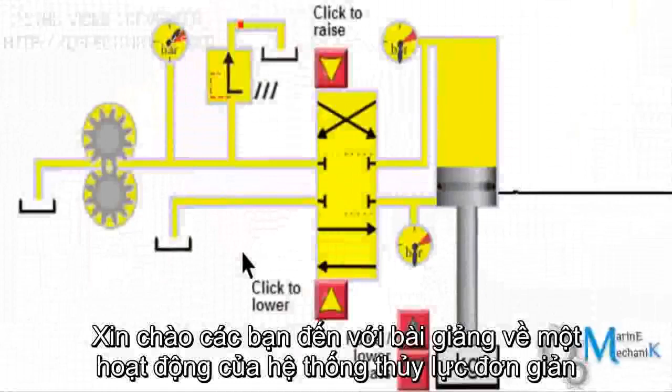Welcome you all back to my new lecture on simple hydraulic circuit working and its simulation. Before proceeding to the working of the circuit, let us understand the components displayed in the circuit.

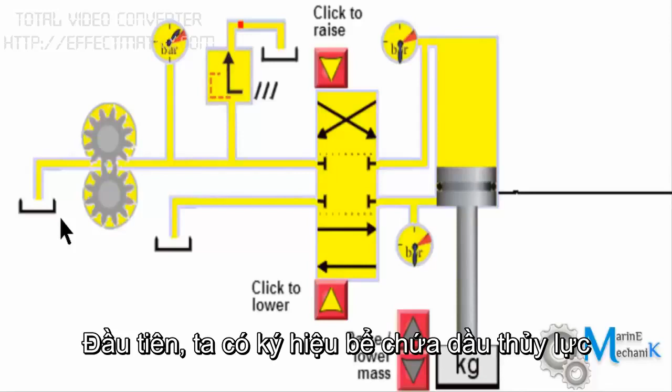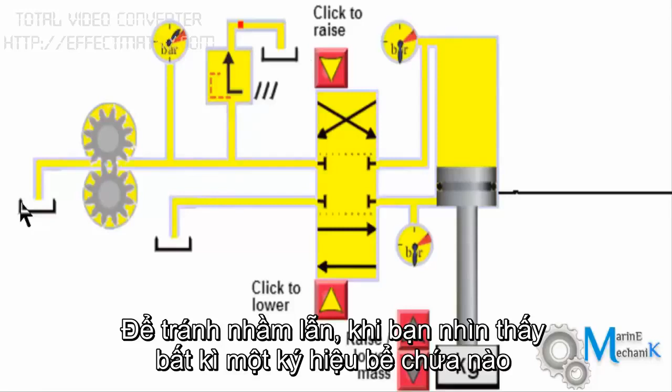First you have the tank. This symbol represents a reservoir which contains the hydraulic oil, or a tank. Again, this is going to be the same tank. Instead of showing the pipelines extended to the same place, for simplicity they have shown it here and also here. This saves or avoids confusion when you understand a hydraulic circuit. Any place of the hydraulic circuit where you find a reservoir like this means everything goes back to the tank.

After the tank, a gear pump takes suction and then presses up the oil directly up to this control valve, that is the direction control valve. You have a pressure gauge here to tap the pressure reading, and a safety relief valve to relieve the excess pressure back to the tank.

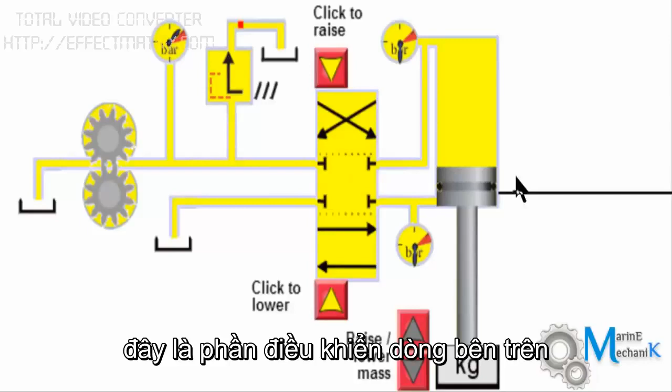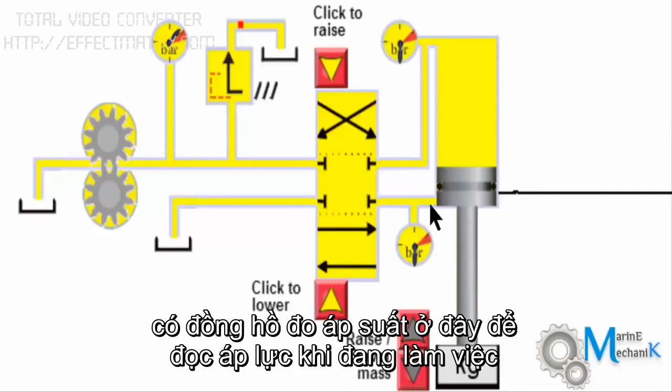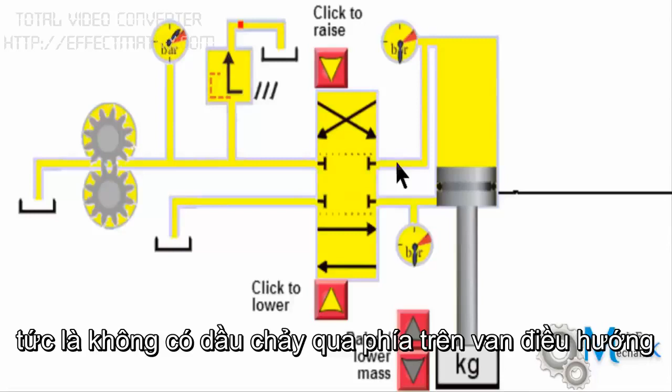Now let's start with a neutral position, that is these ports are blocked, the center blind position, which means no oil can flow past to the upstream of the direction control valve. These are two buttons, which means this valve can be operated either by solenoid or by manual. Since I'm going to operate and show the simulation, it's going to be manual operation. Let's see how it works.

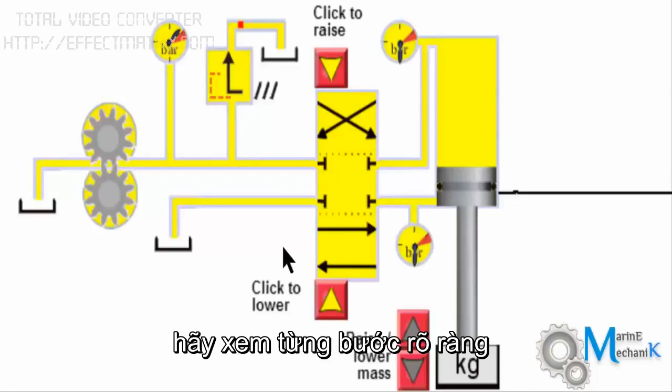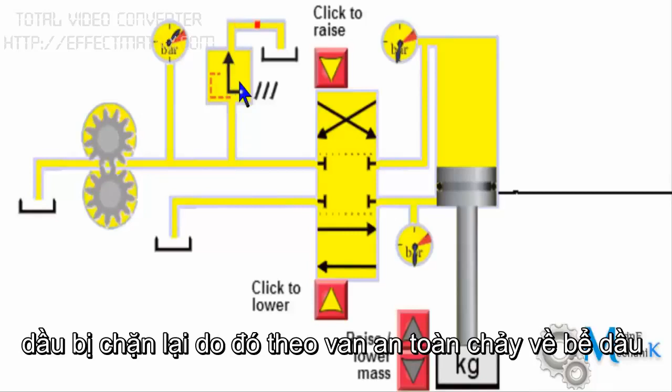I'm going to start the simulation. Let's watch it step by step clearly. As I start the gear pump, it takes suction and the oil under pressure goes here. Now there is no path for the flow of oil and thus the system pressure builds up. It relieves, or the excess pressure is relieved, through the relief valve back to the tank. This continues happening till there is any change in the position of the valve. There is no return oil coming back to the tank because this is also blindfolded.

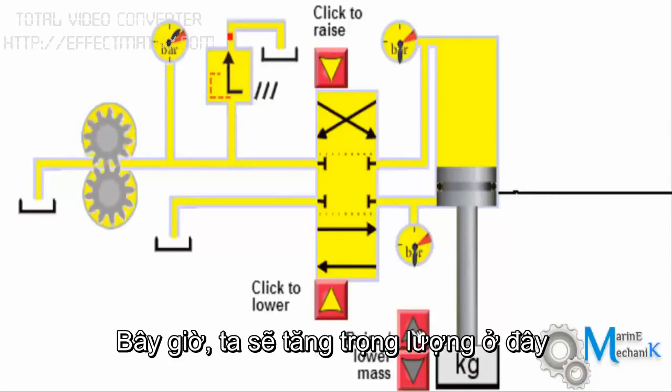Now what I'm going to do is increase some weight here. As I increase a little bit of weight, the pressure required to lift the piston will be slightly more. Let's see how that works.

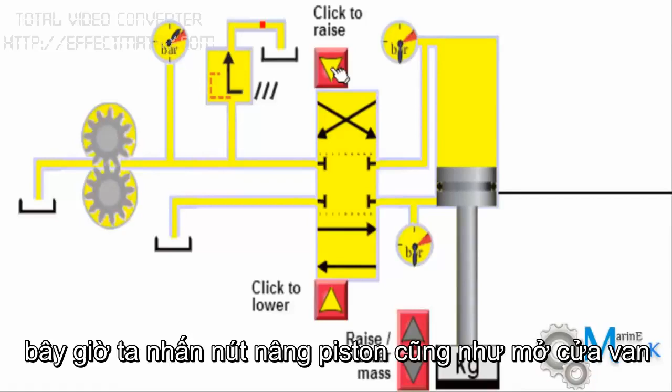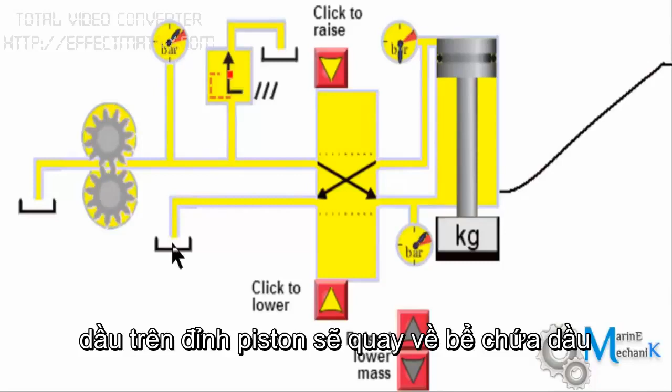We have to click here to raise the piston up so that it lifts the weight. Now I'm going to do it, click to raise. As I do it, the valve position changes and then the oil flows and the piston rises up. As you can see, the oil from here follows this channel and goes underneath the piston, pushing the piston up, and on top of the piston, if there is any oil, that gets relieved back to the tank. This is how the system works.

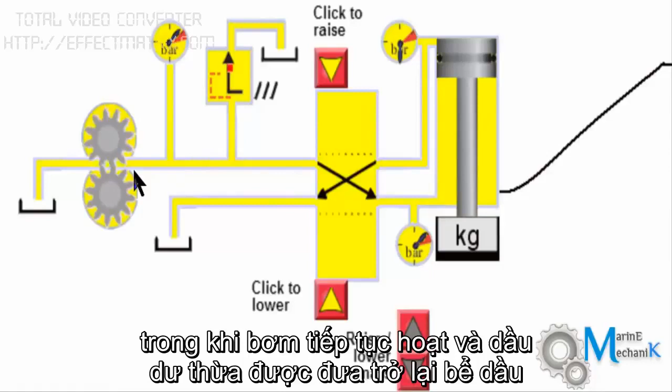You can see the pressure here. It reaches maximum pressure, after which no more oil will flow, where the safety pressure relief valve safeguards the system and thus avoids any rupture of the pipelines. As you can see, the gear pump continues to work and the excess oil is relieved back to the tank.

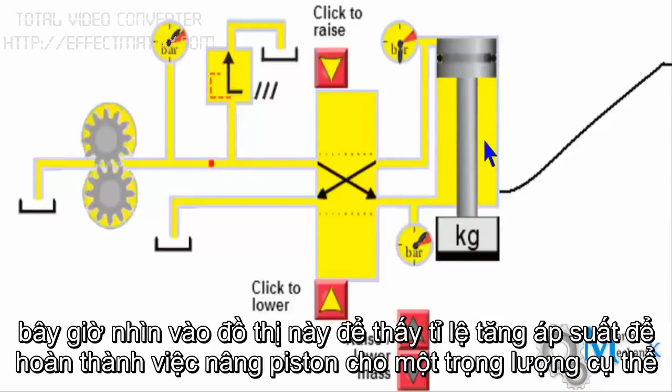Note that the pressure near the piston and pressure after the pump are almost the same, whereas the pressure here is 0, which means there is no oil pressure on the return line. Now on looking at the graph, this shows the rate of rise of pressure to complete the work done in lifting the piston for this particular weight.

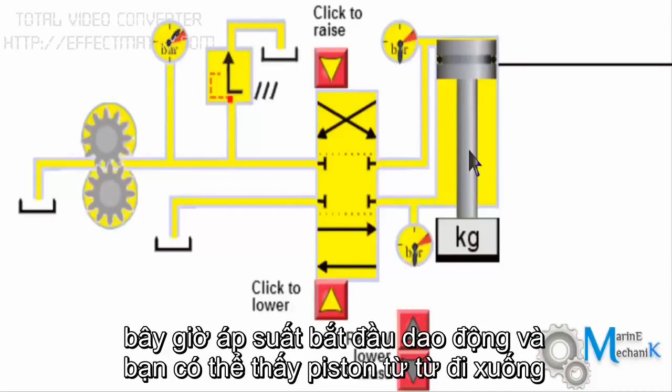Now I'm going to put it back to neutral position, where the pressure drops immediately because there is no more flow of oil as all the ports have been blanked. Now the pressure starts to fluctuate and you can see the piston slowly starts to drop down because the weight is going to compress the oil and increase the pressure here.

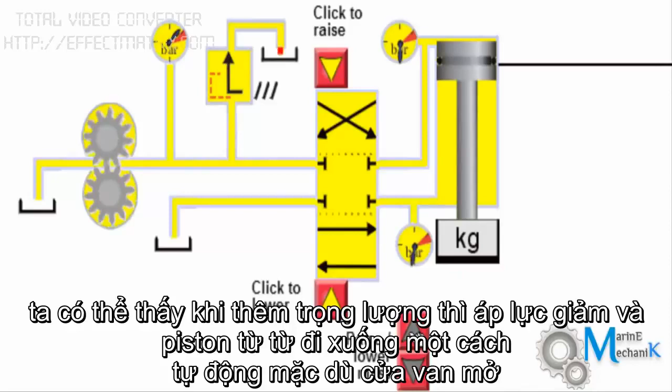I will show you with a little bit more weight. I'm going to add the weight. When I add the weight, you can see there is a drop in pressure and slowly the piston starts to come down automatically even though the ports are blanked.

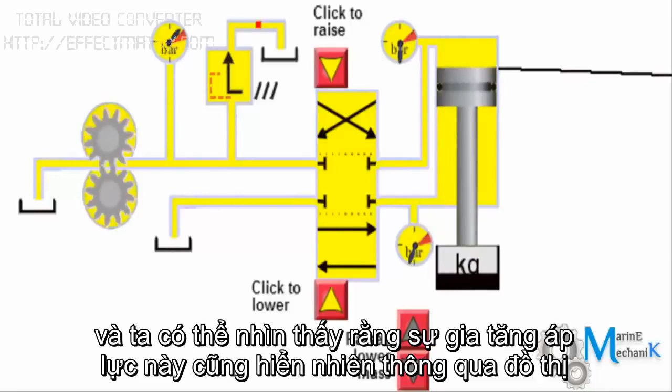This means the oil beneath the piston is getting compressed, and you can see that by the increase in pressure. This is also evident through the graph. The oil above the piston, which was under pressure, gets expanded now.

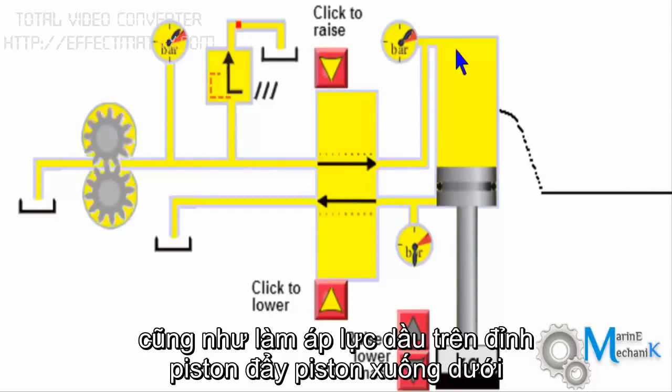Now I want to lower the piston, so what I'm going to do is click on this. As I do that, the oil flows directly on top of the piston, which is indicated by the pressure here, pushes the piston down, the weight goes down, and the oil which was underneath the piston drains back to the tank. Now on top of the piston this is full of oil and the piston can no more go down. Thus, the pressure relief valve or the safety valve lifts and drains back to the tank.

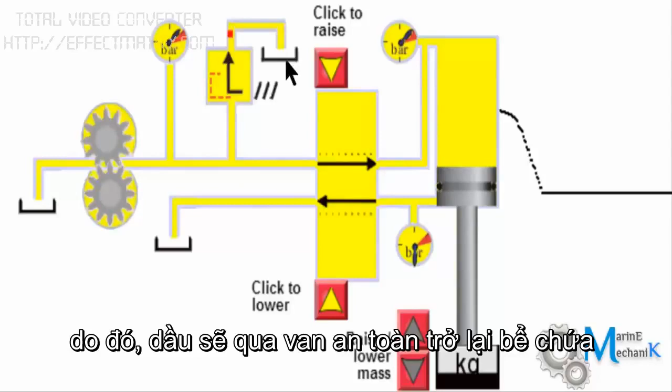Now I'm going to increase further weight. I'm going to put it at full load. Now let's see how this works. I'm going to raise the piston up. Now in neutral position. Now I'm going to raise it up.

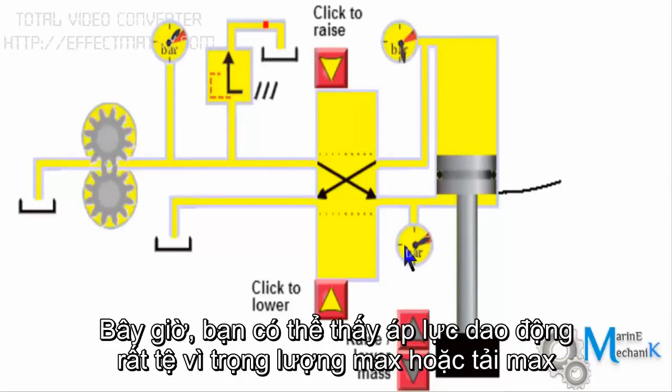Now you can see the pressure is fluctuating so badly because the weight is maximum, or the load is maximum, and the time taken to lift the piston up is more than what it was with lighter loads. Again, after lifting up to the topmost position, the pressure reaches maximum, which is the same as the line pressure, and then the safety valve lifts and relieves the excess oil.

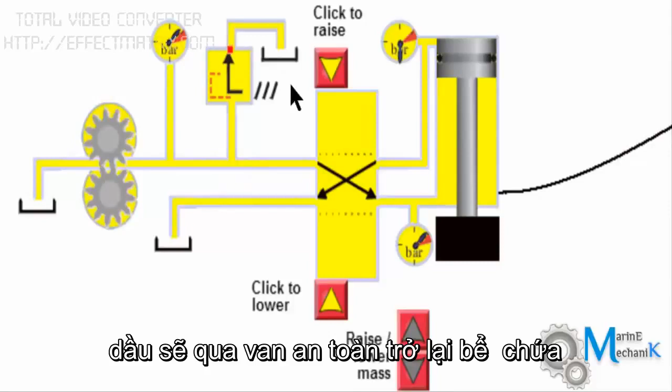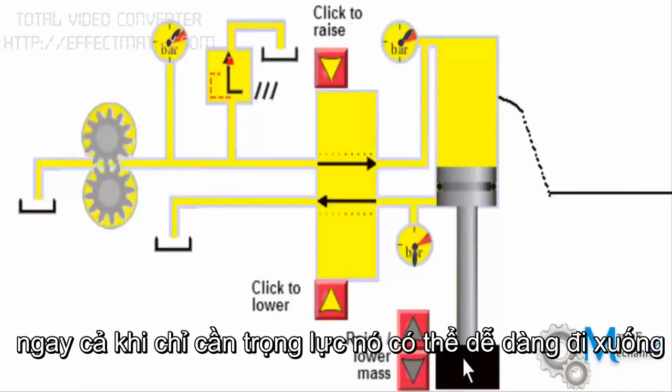Now I will bring it back to neutral position, and due to the excess weight you can see that automatically the oil is getting compressed and the piston drops. So let's lower it now. You can see since the load is high, it will lower much faster. The drop is much faster because the load on the system is too high, so even by gravity it can easily come down.

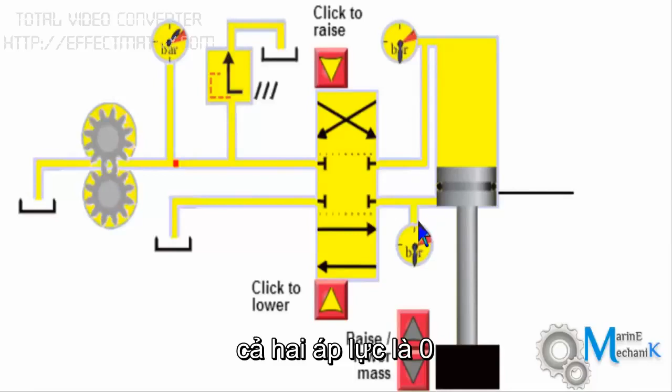Let's once again see how it rises. Bring it back to neutral. Both the pressures are 0. Now I'm going to lift it up. Now the oil starts to flow underneath the piston.

Let me reduce some mass. As I reduce the mass, you can see the piston goes faster. Now I've kept it at the lightest load, and let's see how fast it takes to lift up again.

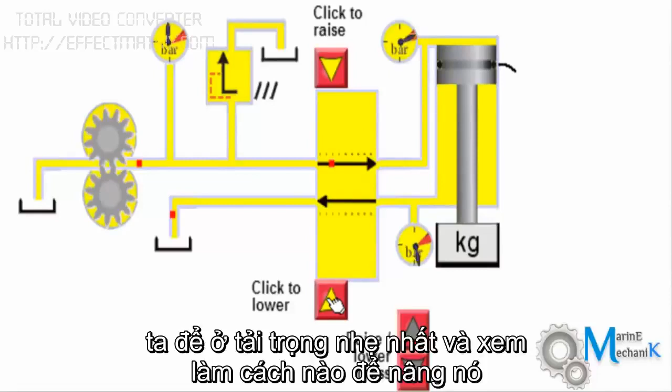Okay, I'm going to lift it up again. This is in neutral position. It will be too fast when we compare it with full load. You can see the graph rise immediately and the piston reaches the top within a very short time.

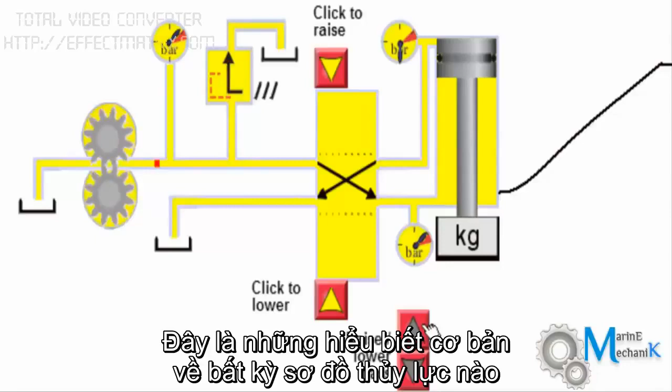So that's the basic understanding of any hydraulic circuit which requires to operate with load. Hope this explains the basic operation of the hydraulic system.